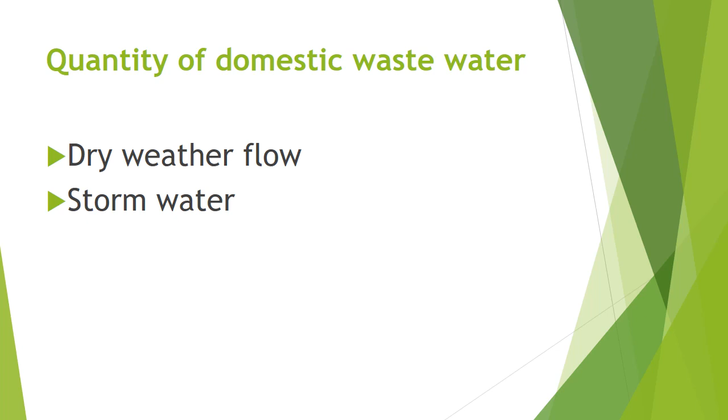Now we will discuss dry weather flow. Dry weather flow again consists of two types of sewage: the first one is domestic or sanitary sewage and the second one is industrial sewage. What is domestic or sanitary sewage? It is the waste and wastewater produced by human or household activities, while industrial sewage is wastewater or used water generated from manufacturing or chemical processes.

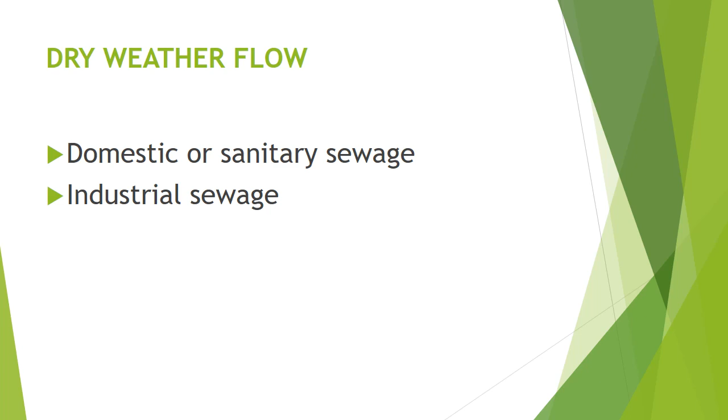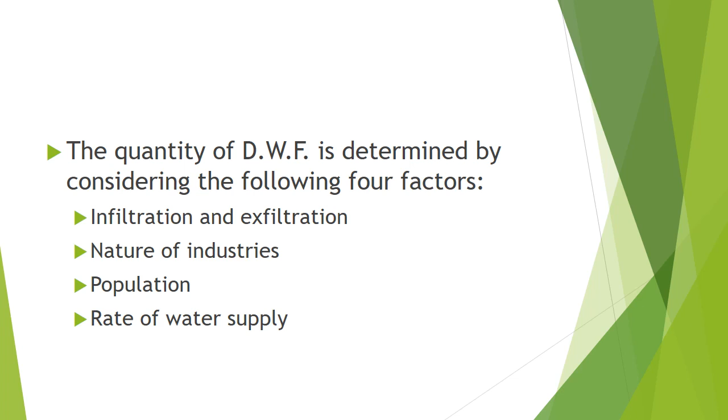The quantity of dry weather flow, or DWF, is determined by considering the following four factors. These are very important. The first one is infiltration and exfiltration, then nature of industries, population, and the last one is rate of water supply.

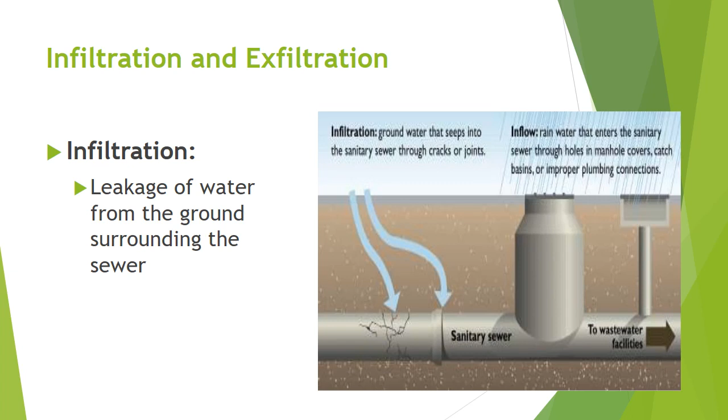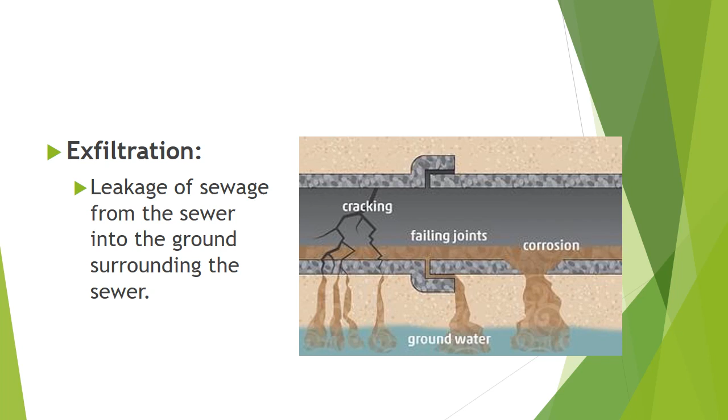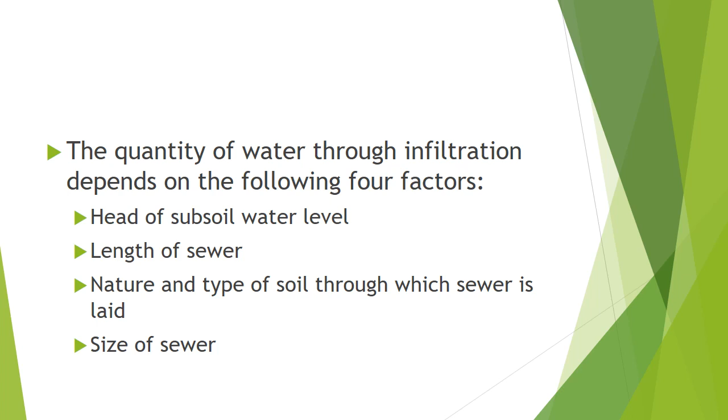Infiltration and exfiltration are both undesirable. Infiltration unnecessarily increases the quantity of sewage, while exfiltration pollutes underground sources of water, but infiltration is preferred over exfiltration. Infiltration and exfiltration can be prevented to some extent by constructing watertight sewer joints. The quantity of water through infiltration depends on the following factors: the head of subsoil water level, the length of sewer, the nature and type of soil through which the sewer is laid, and the size of sewer.

Now, the next factor which affects the dry weather flow is nature of industries. The quantity of industrial sewage will depend upon the nature of industries. Many industries create a high amount of sewage while some industries produce less. So the nature of industries again plays a very important role in the dry weather flow.

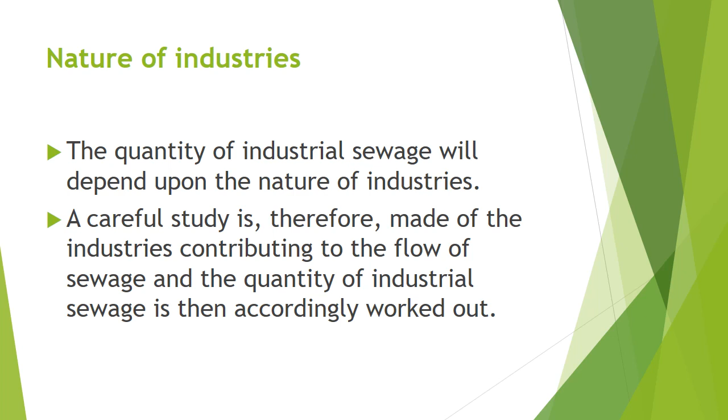The next factor which affects the dry weather flow is population. Just as in the case of a water supply project, the future population after 2 or 3 decades is determined by applying any suitable method of forecast. The design period of different parts of the sewerage system is different, and the following factors are taken into account while fixing the probable life of a particular part of the sewerage system. We cannot design any water supply or sewerage system on the basis of current population. We have to keep the future population in mind while designing such a system, and scope for expansion and modification must be there.

So which are these factors? The first one is chances of improvement in the equipment, then cost of adding an extra unit of the equipment, labor conditions having important influence on the cost of equipment, maintenance cost and overhead charges, operation methods, and original cost of the part.

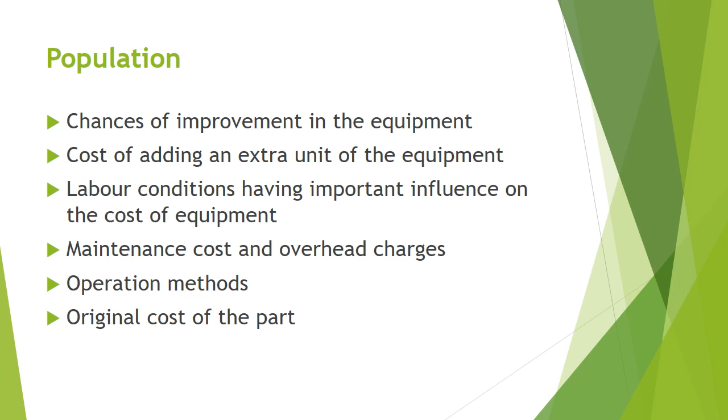Usually the design period of the following parts of the sewerage system are as follows. Laterals are designed for 50 years or so. Branches and submains are designed for 50 years or more. Then main sewers and trunk sewers are for 30 to 50 years.

Pumping plants are designed for 5 to 10 years as they contain mechanical machinery like pumps and all those things. Okay, so it is designed for 5 to 10 years. Then treatment units are designed for 10 to 30 years.

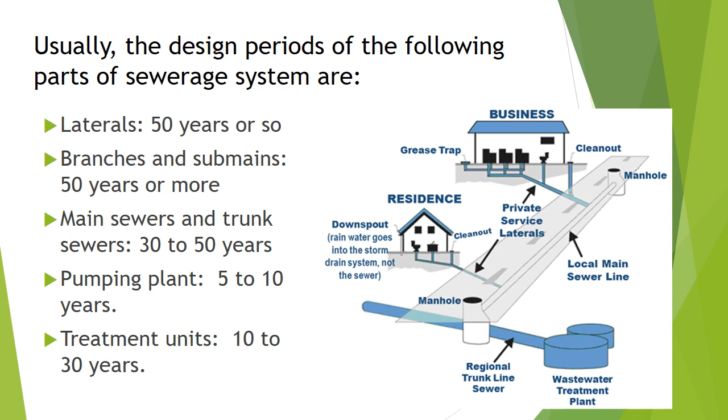The next important topic is rate of water supply. Usually the quantity of water entering the sewer line will be slightly less than the quantity of water supplied. And for practical purposes, it is assumed that the quantity of water which does not enter the sewer is very nearly equal to the extra quantity of water which enters the sewer. In other words, the rate of sewage is assumed equal to the rate of water supply.

Sometimes due to infiltration and inflow, extra water enters into the sewer line. So we assume that the water supply and sewage generation both are equal. The rate of sewage may however be assumed lower than the rate of water supply, to the extent of about 60 to 70%. And intensity of pressure again plays a very important role.

If the water is supplied with high pressure, then what happens? There is more consumption of water and more wastage of water from leakages in pipes and valves, etc. And if the pressure is low, then what happens? The chances of leakages from pipes and valves are less.

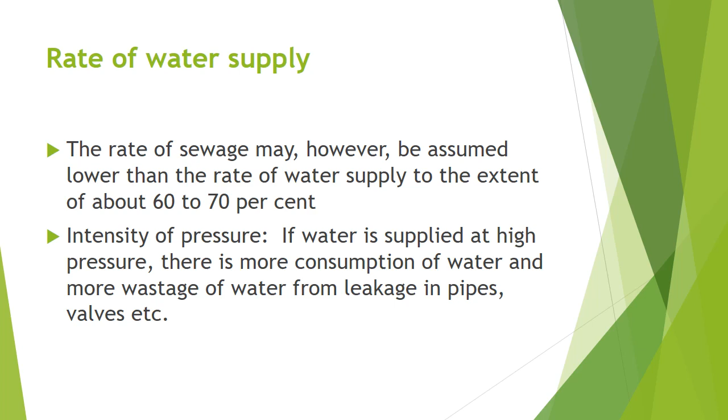Use of water. The use for which water is consumed should be carefully studied. It is quite likely that water supplied may not appear as sewage after its consumption. As we know, we use water for various purposes like drinking, bathing, cooking, washing, gardening, and all those things.

So it is not necessary that whatever water is supplied, the same quantity of sewage will be generated. But due to infiltration and inflow, excess water enters into the sewer line. So generally we assume that the water supply and the sewage generation both are equal.

But water that is supplied to fill up the tanks of railway locomotives will not appear as sewage. And similarly, the quantity of water supplied and the quantity of sewage formed by various prominent industries such as cotton mills and milk plants should be studied, and accordingly the rate of sewage should be decided.

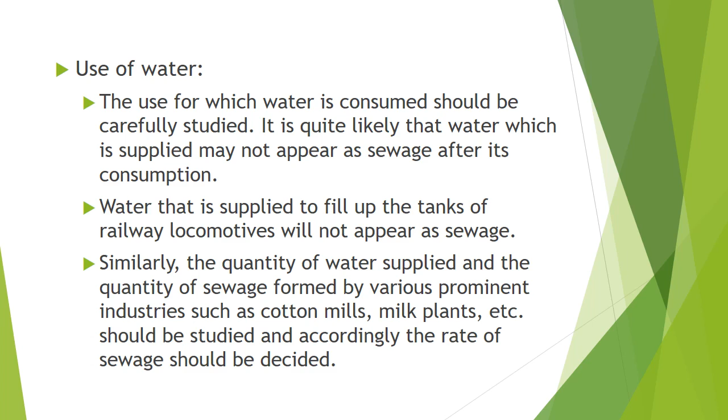After dry weather flow, the next important topic is storm water. What is storm water? Storm water means rainwater, we can say. The quantity of storm water, which is known as wet weather flow or WWF, that will enter the sewer is to be carefully determined, and it involves various factors such as intensity of rainfall, characteristics of catchment area, duration of storm, etc.

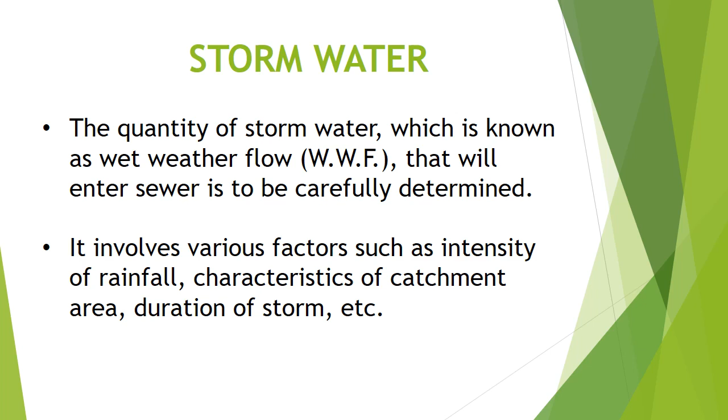The storm water is to be collected and conveyed in sewers to a proper place for the following reasons. The very first one is damp conditions are created which are unhygienic as they provide flourishing ground for microorganisms. As we have already discussed in our previous video, damp conditions are unacceptable as they directly affect our health and create serious health problems.

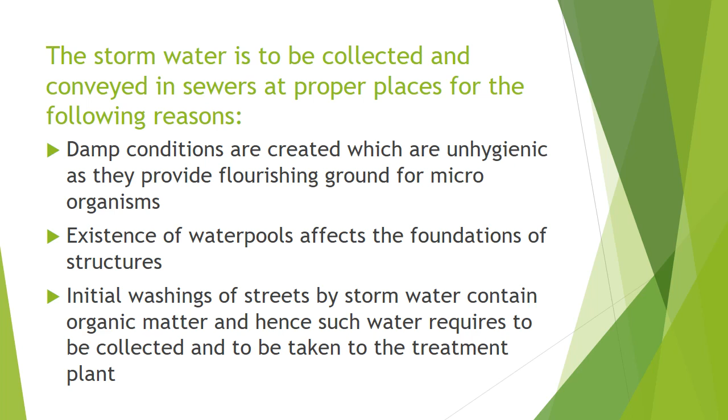Then existence of water pools affects the foundation of structures. Due to water pools or water logging, the building structures may become weak. Then initial washings of streets by stormwater contain organic matter and hence such water needs to be collected and taken to the treatment plant.

Low-lying areas get flooded and the transportation system is paralyzed, which leads to loss of revenue. If we do not manage storm water properly, then in low-lying areas there are chances of flood. So we must manage this storm water.

And stagnant water pools serve as breeding places for mosquitoes. As we know, if water is stagnant for a period of time, then mosquito breeding will start and they will spread disease. So this is about wet weather flow.

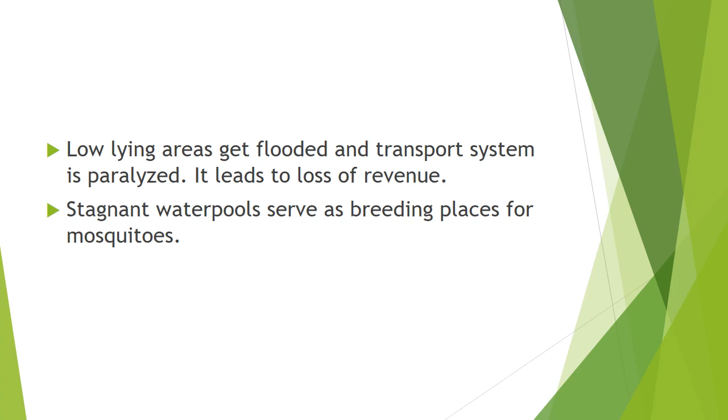In this video, we have discussed domestic wastewater quantity, in which we have discussed dry weather flow and wet weather flow. In dry weather flow, we have discussed infiltration and exfiltration, nature of industries, population, and rate of water supply. While in wet weather flow, we have discussed storm water. In our next video, we will discuss characteristics of domestic wastewater.